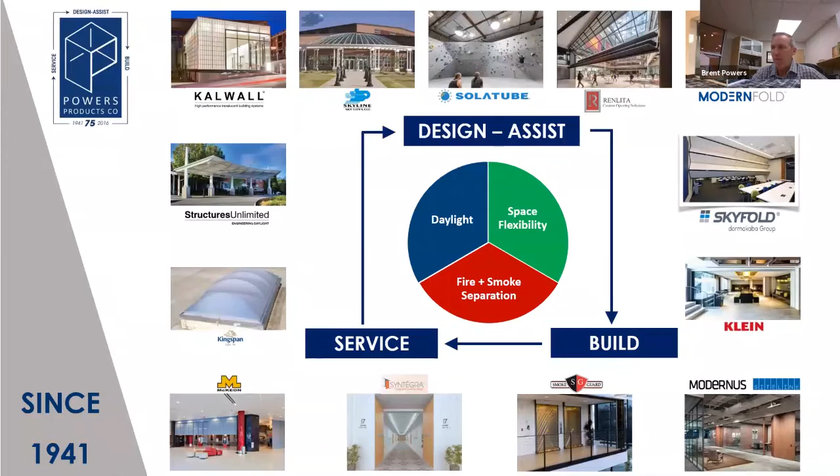Ken Senor has been with us close to 30 years, our product manager for Kalwall translucent daylighting systems. Dave Steele, another guy who's been with us about 20 years, is our product manager for Modern Space Flexibility products, as well as a number of other lines in that area. Keith Lunsford, our product manager in our fire and smoke separation arena, focused on the Smoke Guard and McKeon product lines, also doubles into the space flexibility area with Renlita, a vertical acting wall system. And then Brian Mackey, who works in our daylighting and space flexibility arenas as our product manager for Solatube and Skyfold. We've been around since 1941, so long history in this market, really focused on these niche product lines. We're really kind of geeky and passionate about these little niche areas.

Really the message I want to leave you with is lean on us for support. These are not systems necessarily involved in every project you design, but when you consider these products, we know we can provide valuable support from a design specification, engineering, life safety, and building code engineering standpoint, a lot of different things we bring to the table to support your team and ensure these products are detailed and designed successfully and perform the way you want.

So the three product categories, as we look at this slide: daylighting, Kalwall, translucent panel systems, Skyline for our monumental glass systems, Solatube for tubular skylight systems, and Kingspan for the unit skylight product on your big box warehouse and retail spaces.

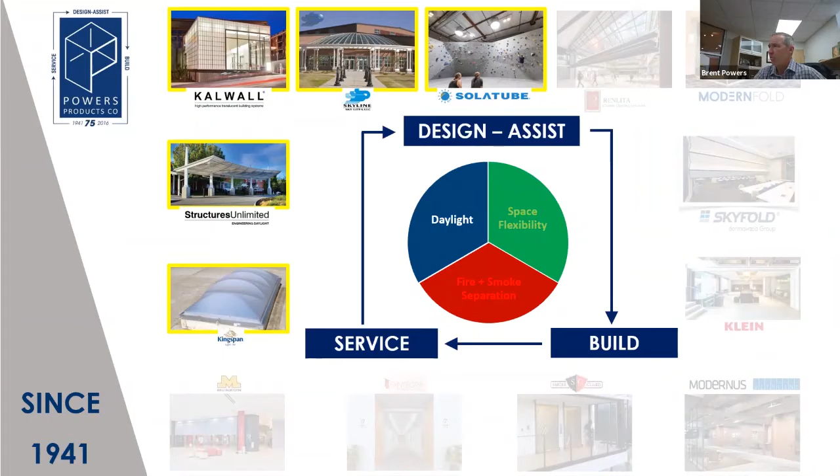Gary, I think we've flipped around there already, but yeah. Back around the horn again.

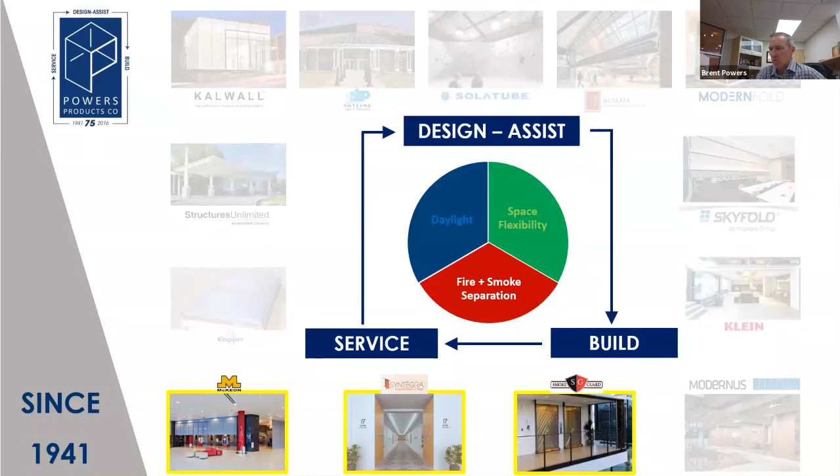Fire and smoke separation arena: McKeon, and Smoke Guard are really the two anchor products there. Wide span products across both coiling steel fire shutters and sliding steel products with integral egress doors, as well as large span or wide span fabric curtain systems from both Smoke Guard and McKeon. We're involved in a lot of atrium projects now, providing innovative fire and smoke control, and you'll see some of that today. Syntegra is an integrated door system for elevator lobbies as well as cross-corridor applications. And in that space flexibility arena, Modern Fold and Skyfold are the anchor products, as well as Renlita. So kind of all things that move to allow your spaces to be more flexible.

So that's what we do from design conception through the life of the building. We install all of these products as well, and we service them as well. So we're not just a rep in that sense. We actually install these products and service them for the life of the building. But that's just a really quick intro to Powers.

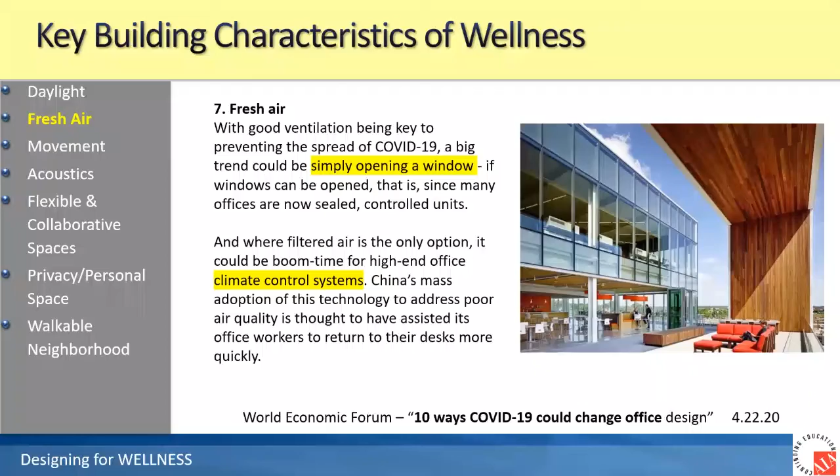Movement - we feel better when we get up throughout the day and move. As mentioned at the start in the Zeppelin article, really activating and making the stairs a prominent feature in the building, and really encouraging people to use those stairways throughout the day to have more movement in their lives.

Acoustics is another important property of a well building. There's a really interesting book and podcast by David Owen called Volume Control: Hearing in a Deafening World.

There's a school in Brooklyn that had years and years of really poor test scores, and they did a deep dive to understand where they could make improvements. It turns out there was an elevated train on one side of the school, and the predominant number of kids struggling on test scores was on the train side. So they did a lot of sound mitigation, and the test scores on that side drastically improved and balanced out through the whole building.

So just a really interesting anecdotal story about how important sound separation is for people to concentrate and perform well. Teachers cited that they'd lose control of the class and concentration, and it took 10 to 15 minutes to regain that concentration every time a train rolled by. So really an important aspect of our buildings is good sound mitigation.

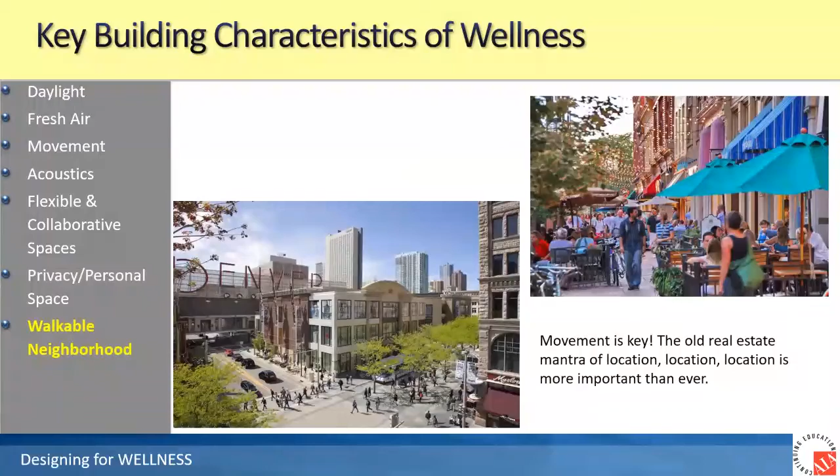And then the last characteristic is a walkable neighborhood. We want movement in our lives, it feels really good to get out, get some fresh air, get some exercise. Fortunately, we have some great downtown areas in our state where people can get out from their office and walk around. So it's a pretty important aspect.

We're now going to look at some of the industry standards and rating systems. I would imagine most of you are familiar with all of these, and may have been engaged with at least a couple of these metrics on your buildings.

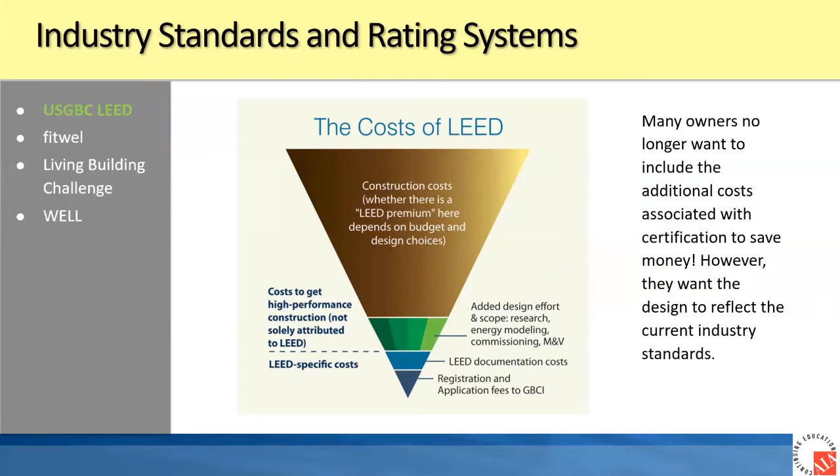We'll start with LEED. It's been around for a long time now, more focused on building performance, but it really was the standard for a long time in terms of rating systems used. We're seeing quite a shift the last couple of years. We get involved pretty heavily, especially on the daylighting side, with evaluating buildings for LEED performance, and we're seeing a real slowdown in buildings going after LEED certification. I think architects and building owners are using LEED as a guideline, a design practice document, but maybe not spending the extra money to actually get the plaque on the wall. So that's one movement we've been experiencing lately.

Some of the other metrics are really interesting. A new rating system called Fitwel. The scorecard includes 55 evidence-based design and operational strategies, and it's looking more at the individual occupant's well-being — how well the building supports the people inside, in terms of promoting physical activity, movement throughout the day, reduction of morbidity and absenteeism, and providing healthy food options or proximity to available healthy foods.

And then some really interesting ones: impact on the community. How well does this building support its community in a positive way, as well as support social equity for vulnerable populations? It's fascinating to see these rating systems shifting more toward a holistic community and occupant well-being, in addition to just how well the building performs in terms of sustainability.

Similar theme with Living Building Challenge. This one was modeled around a flower, the petals of a flower, which is pretty interesting. It's really looking at the regenerative aspects of the building and its contribution to the wellness of the people inside. The petals of the flower include place, water, energy, health and happiness.

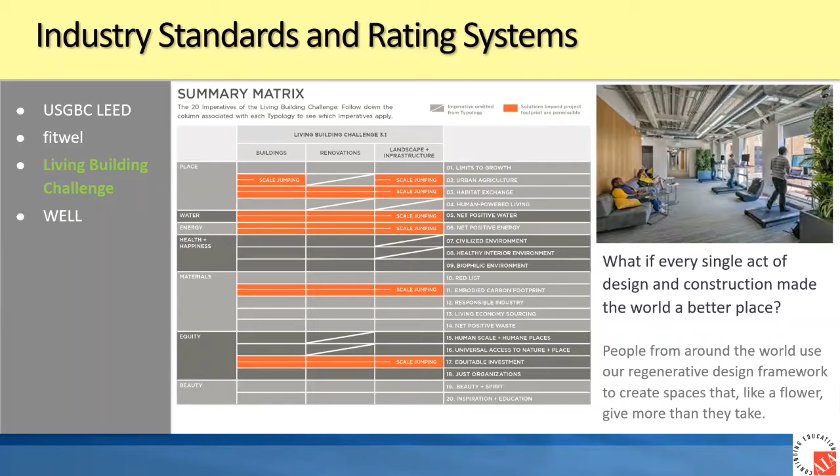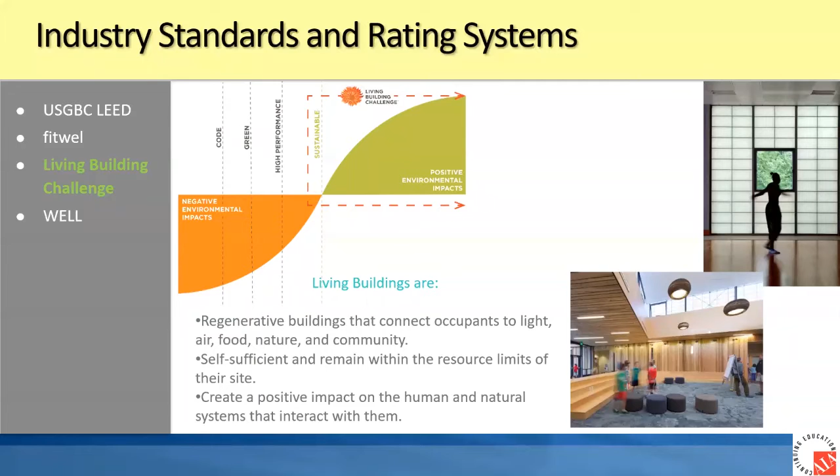It's a cool transformation. The Living Building Challenge really emphasizes not just limiting or reducing negative impacts, but pushing the building into the positive — how does it remain self-sufficient or regenerative in terms of a positive impact on the people, the environment, the community? It's a rigorous, challenging rating system, but it really is trying to push us to have our buildings and our environment be positive and uplifting.

And then the International Well Building Institute — Well, again, similar concepts and characteristics to the theme we started the presentation with. The mission is really to transform buildings and communities in ways that help people thrive. This looks at community connection of our architecture, and the wellness of individuals — how well it supports our nourishment and our mind, air circulation and fresh air, thermal comfort. Sound is an important one here too, and movement, really getting people up and active again.

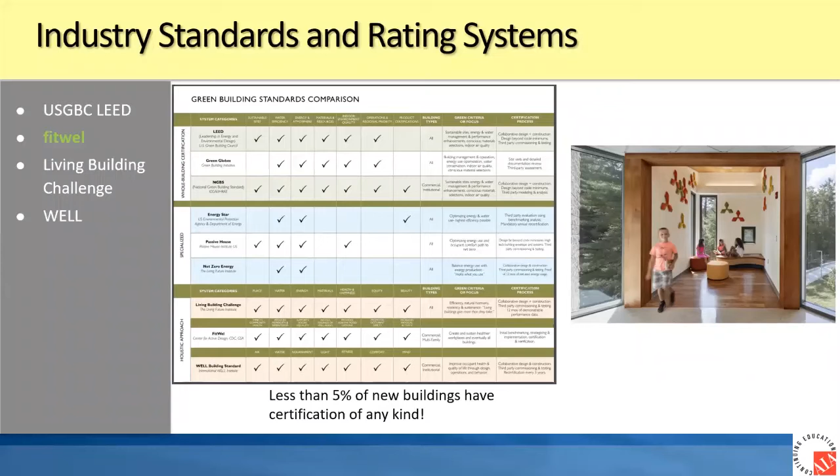And one thing to note: less than 5% of new buildings have certification of any kind. So still, a vast minority of the projects we're seeing are certified in any way.

On to economic and performance benefits of wellness design. A huge industry, a multi-trillion-dollar industry in wellness. And I think that's going to become even more important as we learn more about how to build around COVID and how to build safe places for us to spend the bulk of our lives.

One of the interesting aspects of this report was it's vital for a company to show employees that they really care about their well-being and wellness. It's really important to employees to know the company cares about them, not only in terms of their workspace, but also addressing emotional and relationship needs, really going to bat for their employees. When people felt their company didn't care about their wellness, it had a huge negative impact on whether they wanted to work for or stay at those firms. So again, that reiteration that people really want to know they're cared for, and our buildings and design can really impact people's impressions of how much that company cares for them.

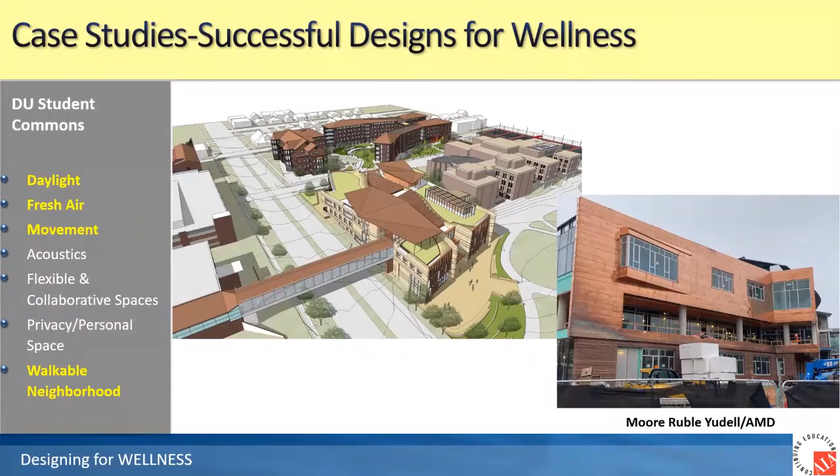So this is DU's new student commons, just a beautiful building right on Evans. A great social place for the college—it's really open, with a lot of daylighting coming through, as well as a lot of traffic in and out of the building.

This is where the old bridge across Evans connects. They've replaced the building on the north side of the highway with this amazing community building. They really wanted it open, as you'll see in the floor plan or this section coming up. They wanted all 3 floors to be really well connected and communicative.

You can see the floor openings, and they're all an unusual shape, kind of a kidney shape, through the building. The problem is when you get more than 2 stories connected in an atrium, you have to add a smoke control system. With the scope and size of this building, it was really tough to design something that would even function, it's just so big, trying to bring enough makeup air through.

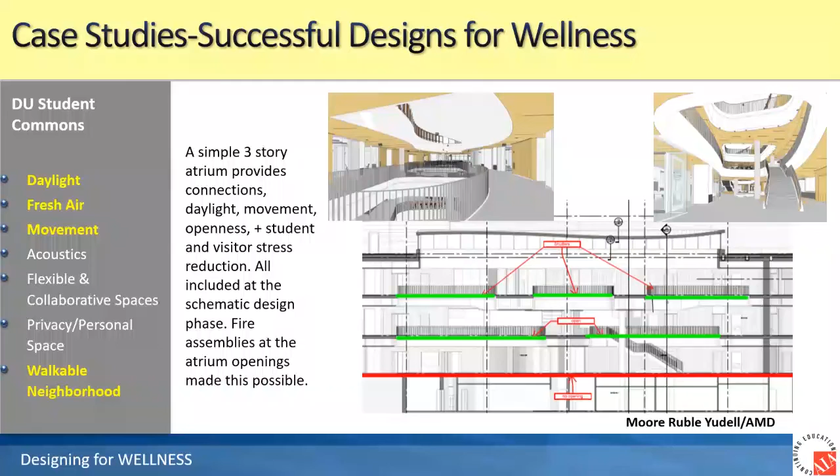So it was off. Between the second and third floors, you see those horizontal green lines. We went with horizontal fire shutters and completely eliminated the need for any smoke evac in the building, even as large as those openings are. I think our largest one is about 28 feet wide and just over 40 feet long, substantial sized openings. We were able to put these horizontal shutters, attached them right to the deck below, and they're completely concealed within the soffit. They automatically close, don't need any backup power or anything to force these doors to the closed position, to get a 2-hour fire rating between the floors. So a great way to save a substantial amount of money in this atrium space and keep the space as open as possible.

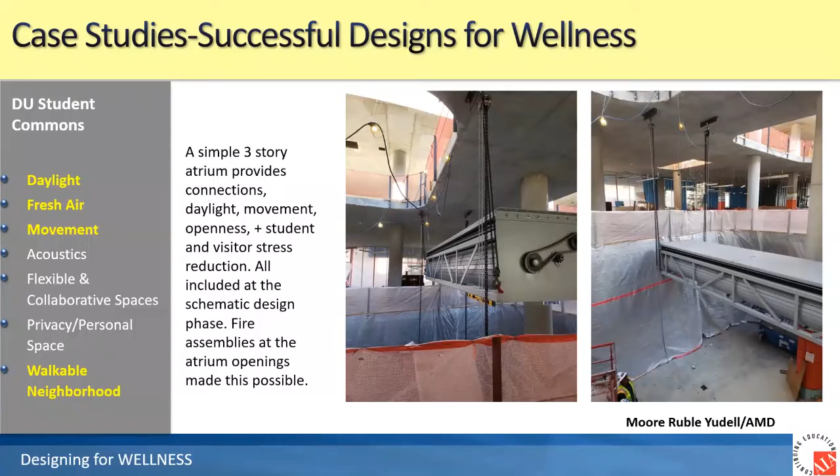Heavy. The one we're looking at here weighs about 16,000 pounds. So it's good to get us in early to help make sure we've got the structural and some of the logistics planned ahead to get these units in.

Even in the early design meetings with the architect, sound, function, and design were all very important to the whole design of this area. To fit in better with the design, they needed to have a radiused wall, so it's almost a complete radius. It does stop in an area where they can stack the panels out of sight, 17-foot high panels. And just a lot of challenges here.

We had to have full egress out of there, so that called for pass doors within the panels. They also wanted some panels to have projection surfaces on them that doubled as marker board systems. So it was a very functional space.